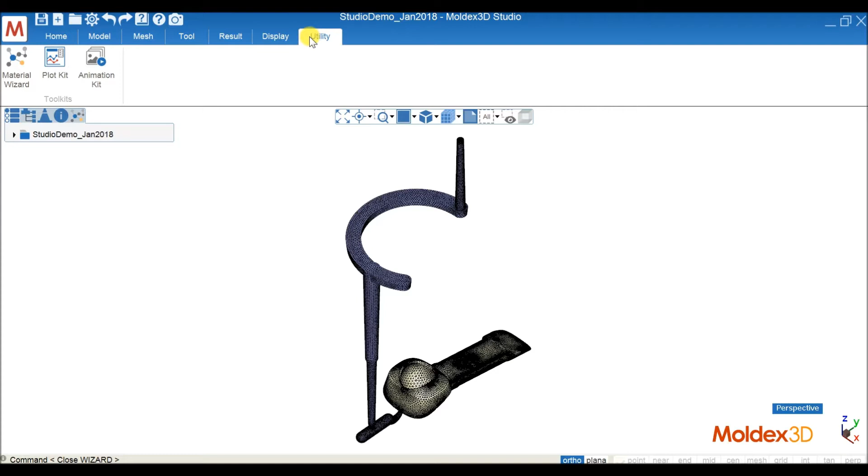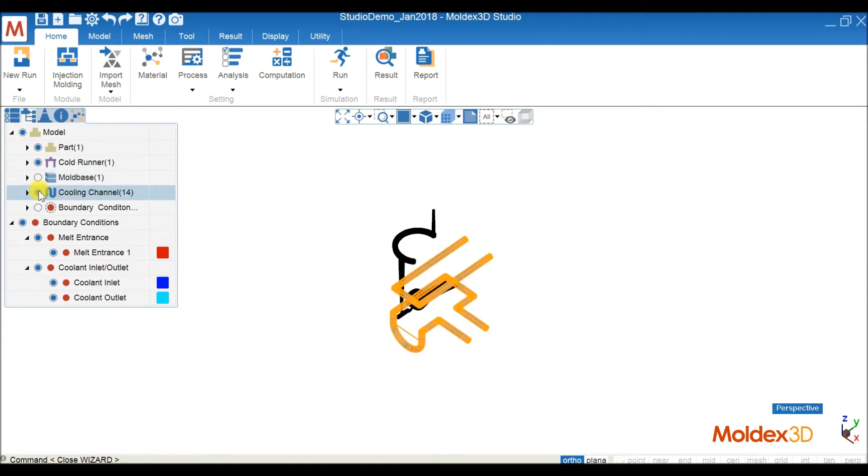So on the top that's the ribbon menu, and on this side we have a tree-style structure - this is the project tree, and here we have a model tree. This is very convenient for users to show or hide certain objects. For example, if I want to show the mold base, the cooling channel, or hide it, it's very easy to control in this model tree.

We also have the defect tree, so we can see the surface mesh defects or solid mesh defects that remain for the mesh. Besides the defect tree, we also have a run information list - this is new in Studio. Users can check again the model details, the material, or the process condition.

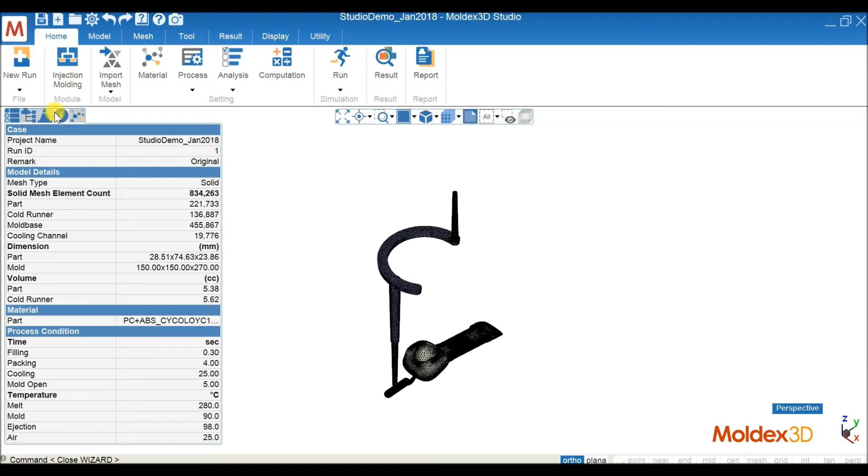And the last in the model tree, we have the geometry and also the material which belongs to it. So this is the interface for this R16 Studio, and for the operation we also have new tools here.

As you can see, we have tools like edit remarks, in case you want to give a certain name for a certain run - for example, here we have original, revision 1, and revision 2, something like that. That belongs to edit remark.

We also have export runs - for example, if you want to export run 1 to a new project, you can freely do that, and you can give a specific name for that one too. So edit remark and export are very convenient.

Inside we also have copy run, clear results, or delete runs. For copy run, for example, we can copy input data only, or full run data in case you already have results, and you can also customize which results you want to copy. This gives benefits to users who want to copy several runs but only change certain inputs, keeping the rest the same.

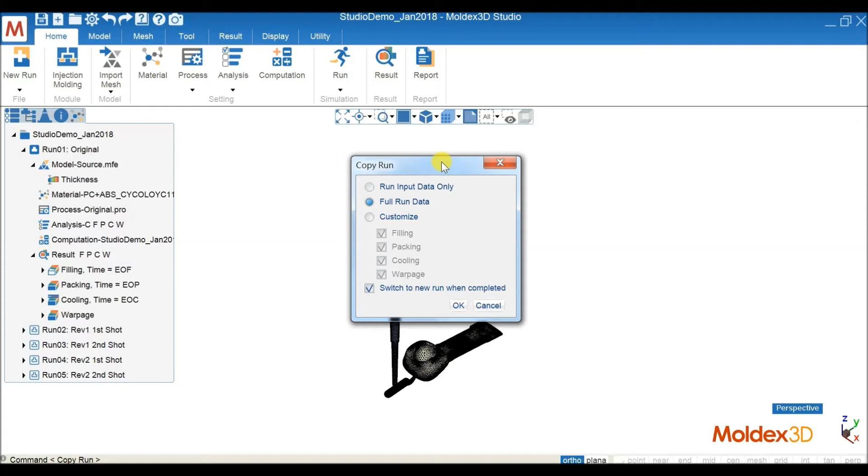So it will be convenient for users to do the operation - run input data, full run data, customize. Users can pick anything they want.

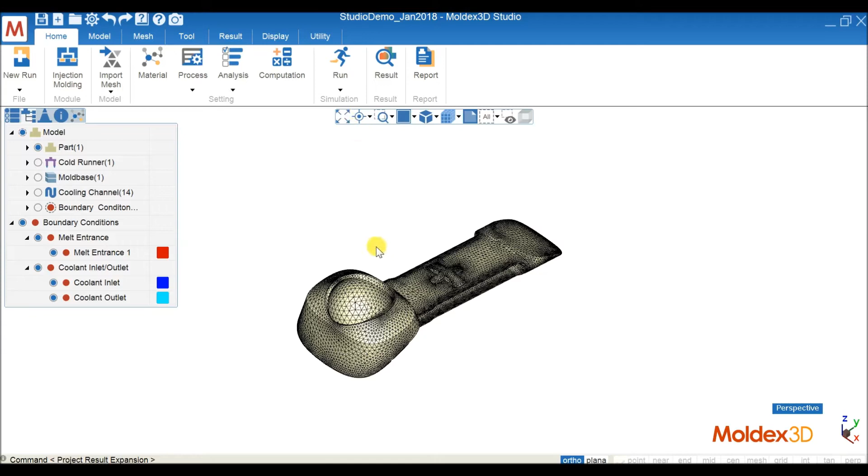The next section is about MCM analysis. We know that in regular injection molding, one common case is MCM, multi-component molding, where we have a part or part insert, something like that. Basically in this case, like I introduced before, we have the problem about the ball socket with a sink mark because of its thickness.

In the studio, we can also display the thickness distribution like this. As you can see, the thickest region will be on the ball socket, which induces the sink mark problem.

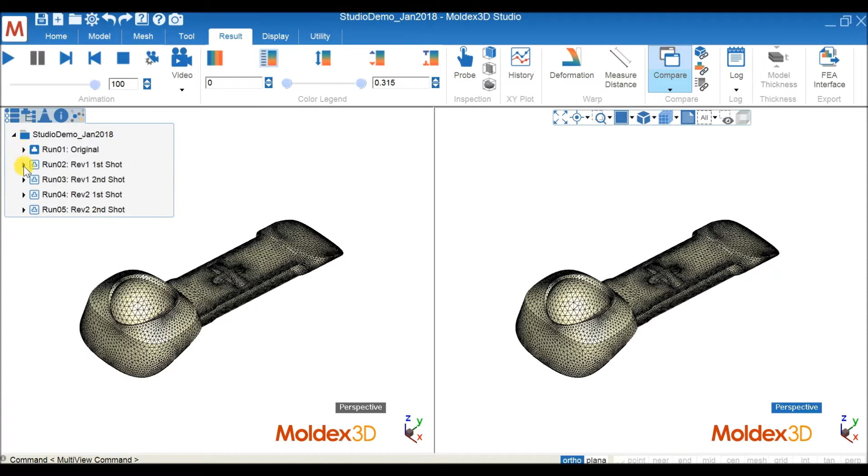So that's why we will try to do a 2K injection molding for this case. And I would like to compare using our studio interface, side by side on the left and right. This is a special feature in the studio that you can compare two different runs side by side, left and right, in one platform, so users can conveniently control and show everything in one place.

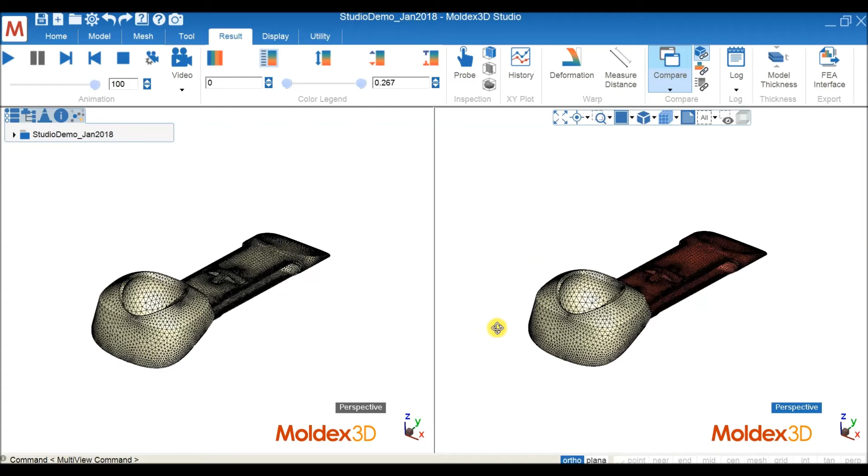So on the left side you can see that's a 2K injection molding. The first shot is on the beam, and the second shot is on the ball socket. So our studio can now also support this 2K injection molding, or MCM technology.

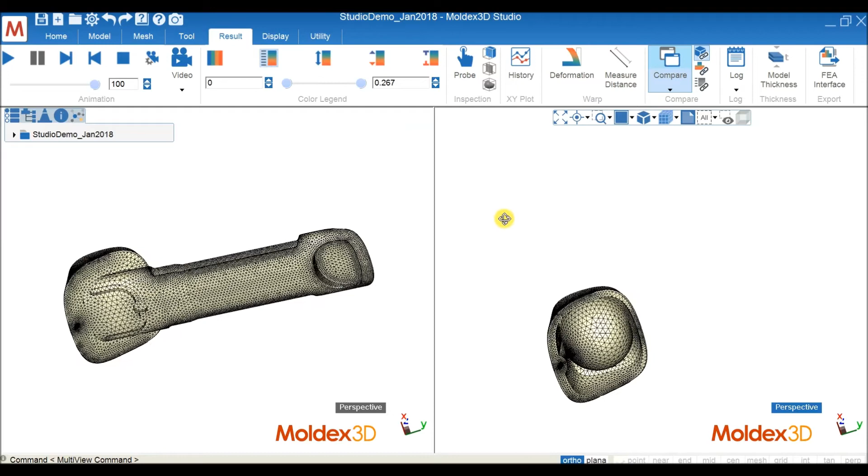Here we can also see why we need to change to 2K injection molding, because the thickness for the ball socket will be reduced by using this technology. So this will help the designer solve their sink mark problem.

We can hide and show the part insert in the model tree, and also check the material. Users can easily set the material for the part and for the part insert very conveniently from our UI.

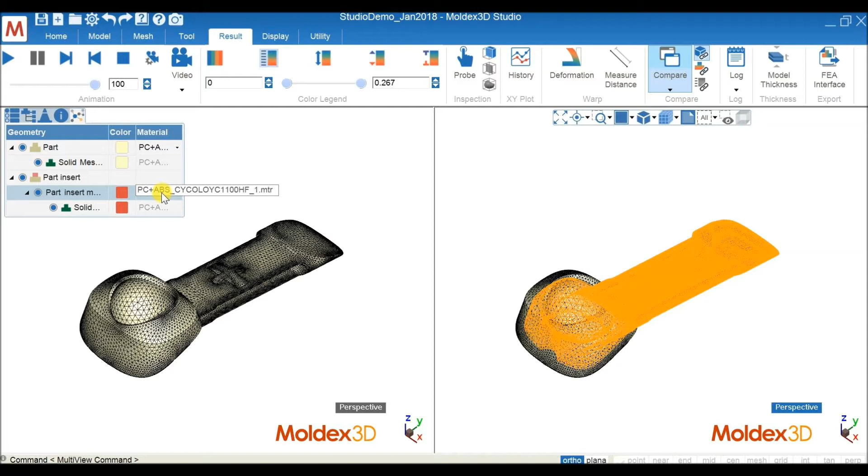On the left side, I want to open Run 2, which is the first shot for revision 1, so you can get a feel for this 2K injection molding. On the left side you can see the first shot, the beam, and on the right side the second shot, the ball socket.

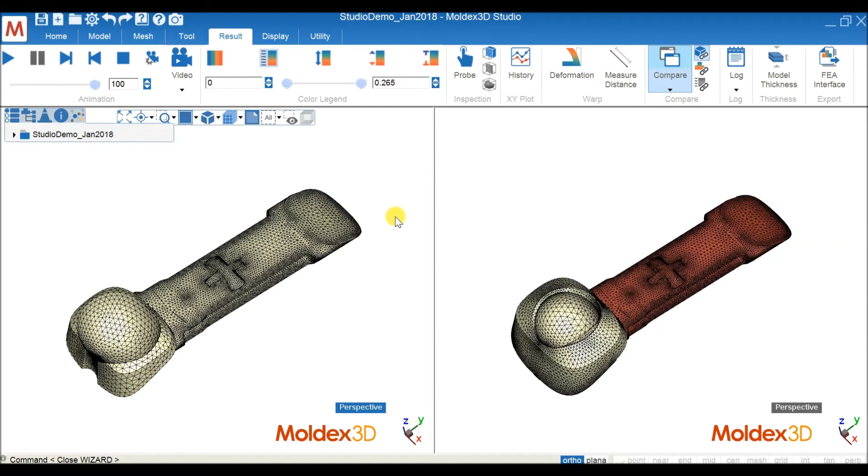So this is our MCM analysis for the studio. The special setting we usually have in MCM analysis is in the computation parameters, where we have an MCM tab, and here we have what we call a link with the previous shot.

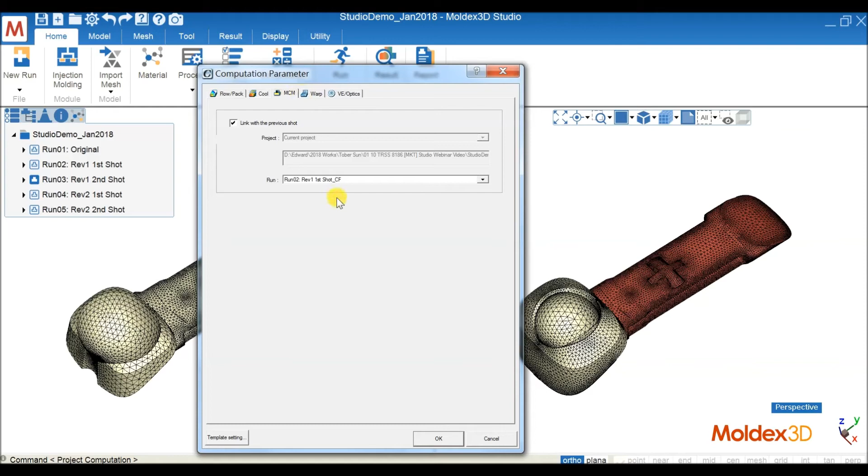This means your second shot will have a link with the first shot, so it carries the temperature result from the first shot. This will influence the result for our second shot, which is the case for example in overmolding.

The last section of the demonstration video is about result inspection. We'll see several new features in R16 Studio. For example, the first one is display maximum and minimum.

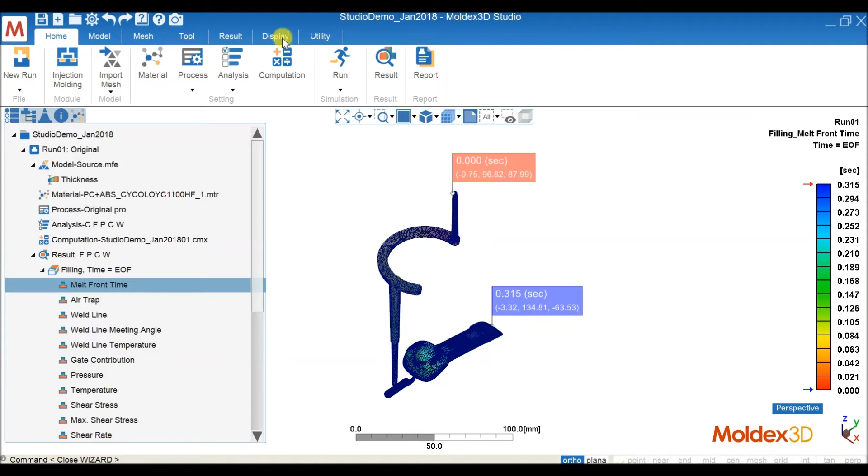When you select a particular result, like melt front time in this UI, you can check the maximum and minimum values shown. If you turn off something like the runner, these maximum and minimum values will automatically update themselves, which is very convenient for users. If users want to hide it, they can also do so in the display setting. That's our new feature, display maximum and minimum.

The next thing is, for example with temperature, if we want to check the maximum, the red color, the highest temperature, we can use the clip and also see the distribution—what is the temperature distribution for this case.

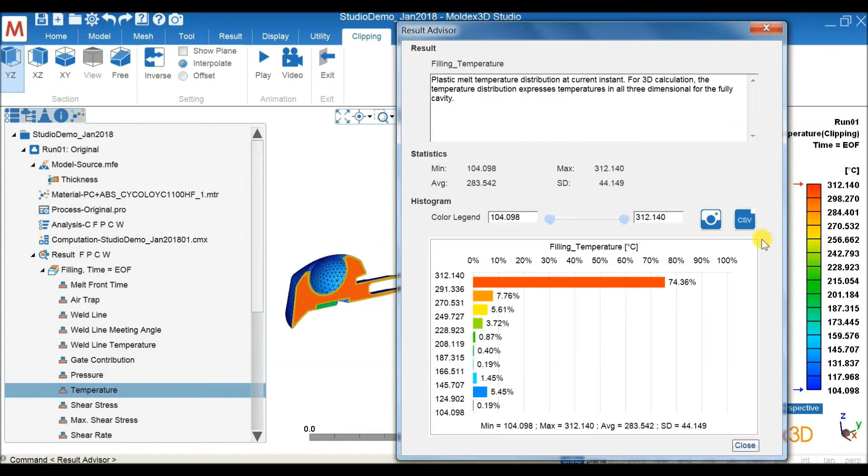We have a new feature now in R16, we call it Result Advisor. Users can double click on the result, and it will show the statistics or distribution of the temperature. It's very convenient to use the studio to check or investigate the result.

The third new thing in result inspection is a tool we call probe. If you notice, in the project we have what we call the measure node, but in R16 Studio we have probe.

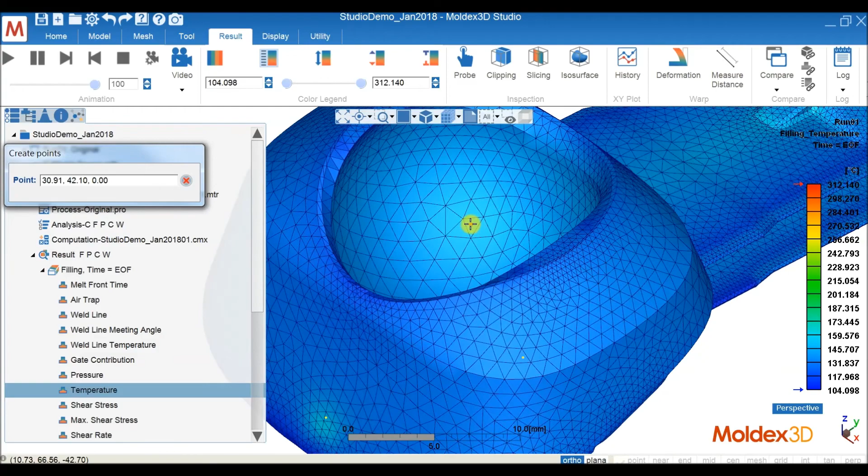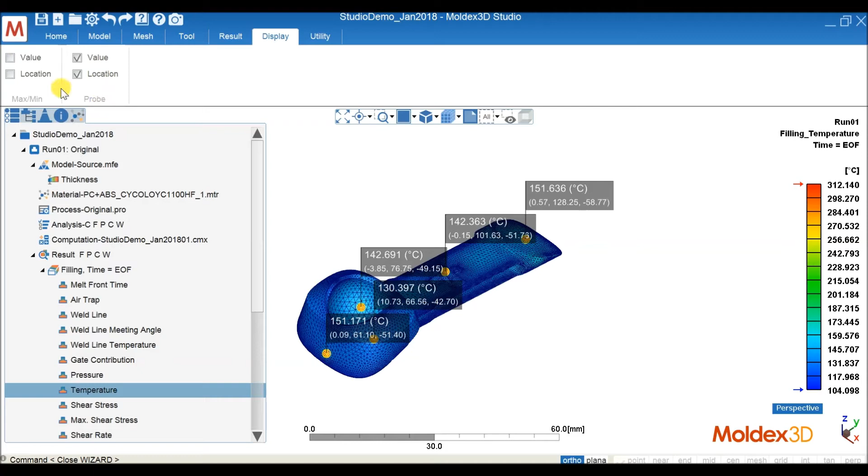As you can see, we can place the probe anywhere—it doesn't necessarily have to be at a mesh point or mesh node, it can be outside of it, as shown when I pick it outside the mesh node. But even picking it outside there, we can still check the result. Our probe can do intermediate value calculation, performing the calculation at intermediate mesh nodes. So we can double check that the probe is not on the mesh node, but it can still show the result.

In case users want to hide it, they can set that in the display setting. That's the probe, and we can also check it in the model tree in case the user wants to hide the probe or show it.

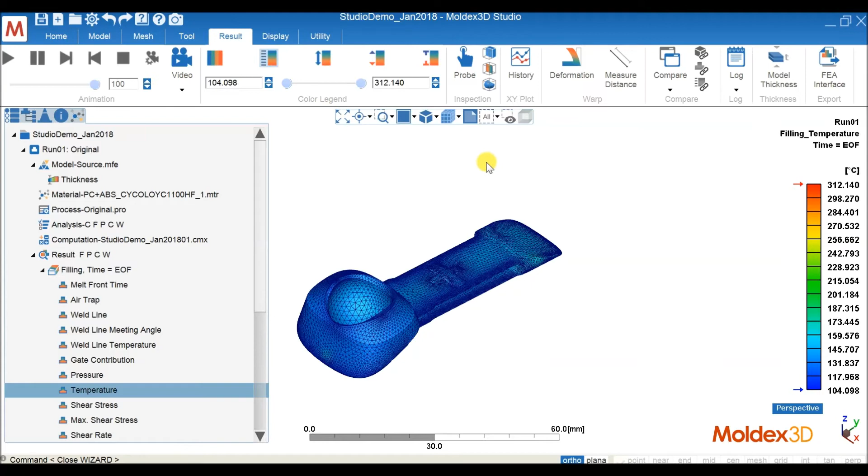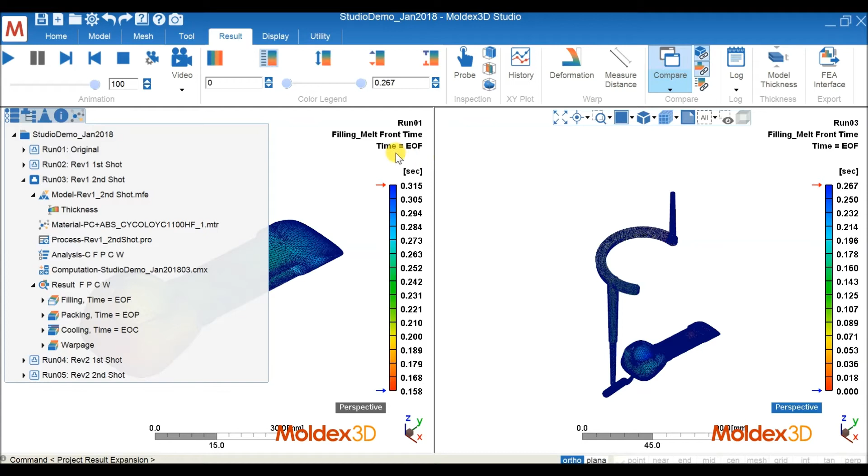Now I want to compare again the original design, run 1, with the revised design, run 3, the second shot with 2K injection molding. We can use the compare tool on the top side. On the left is run 1, and on the right is run 3. We can sync the angle and sync the result, so now it shows the same result, melt front time, for both left and right side. As you can see, the original design and the second design have different melt front behavior because they have different objects or parts.

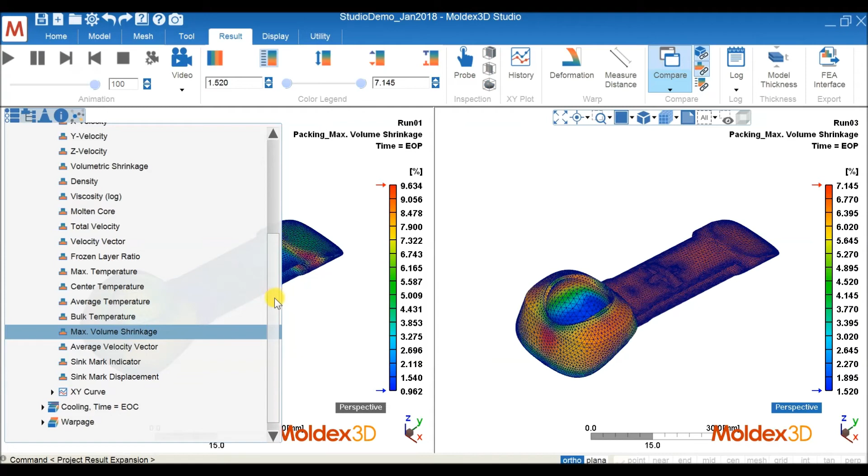Next, I want to investigate the volumetric shrinkage. We just need to select the volumetric shrinkage for one run, and it will automatically change the other run to show the volumetric shrinkage too, using the sync result tool. Then I click sync range, which means the range on the left side will be the same as the range on the right side, helping users judge which design has the higher shrinkage.

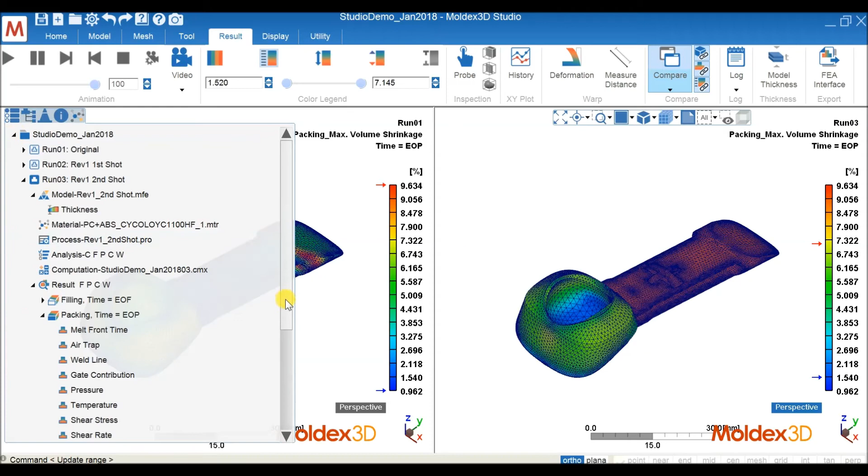For example, on this side we can see that run 1, the original design without 2K injection molding, has the higher shrinkage. So the revised design 1 really can solve or improve the problem for the sink mark seen in the original design. Now I try to open the sink mark displacement. As you can see, the sink mark on run 1 is higher, based on the color distribution and also the value.

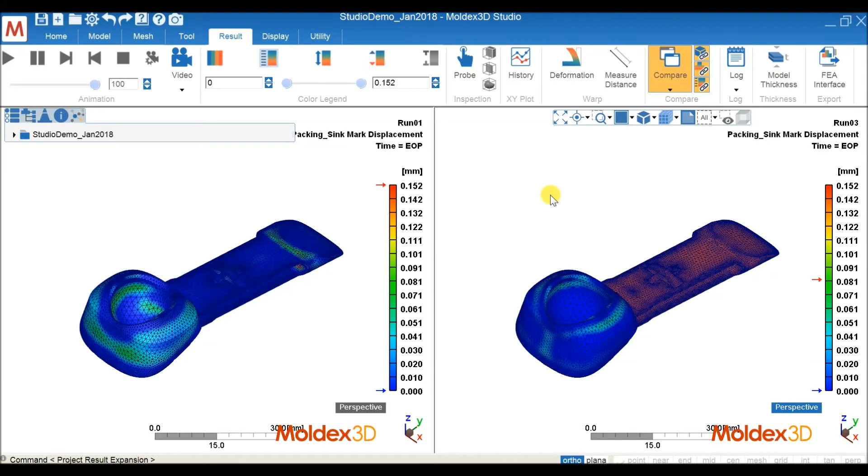So that's how we can use the Moldex3D Studio to do the comparison using sync angle, sync result, and sync range. This is the fourth new function in Studio.

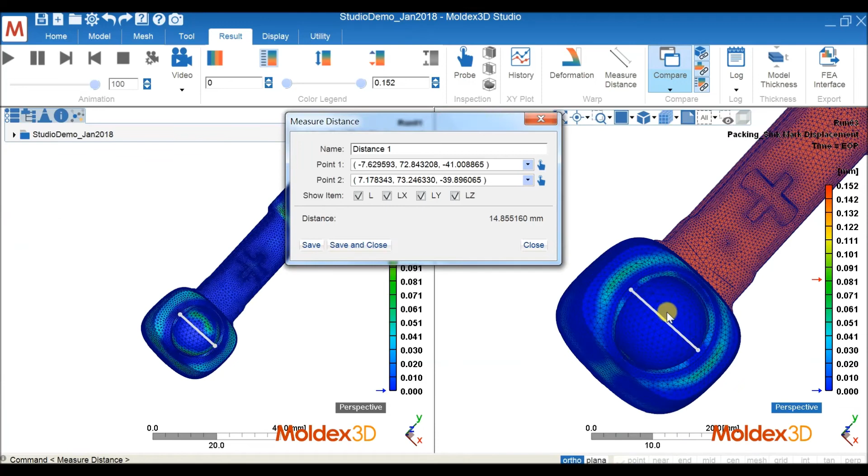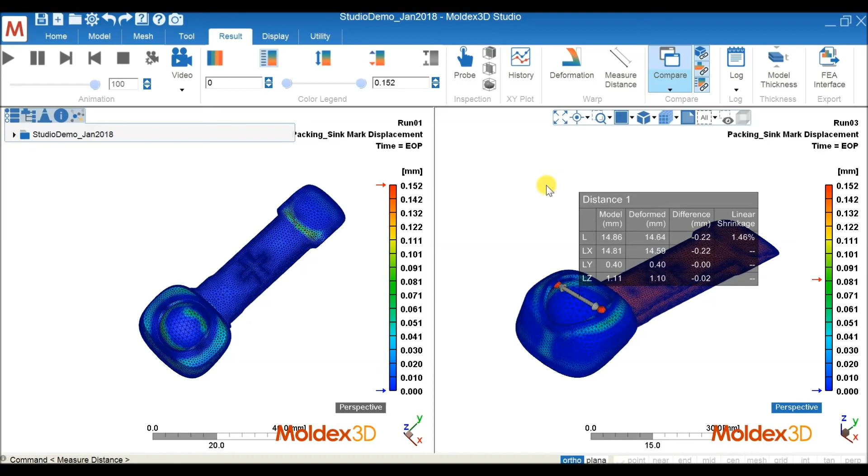We call it measure distance. Basically, users just need to point to 2 points anywhere they want to select, and it will help the users do the measurement, for these 4 things: model size, the size after deformation, the difference, and the linear shrinkage between those 2 points. The Studio will help plot this table, showing the linear shrinkage on those 2 points.

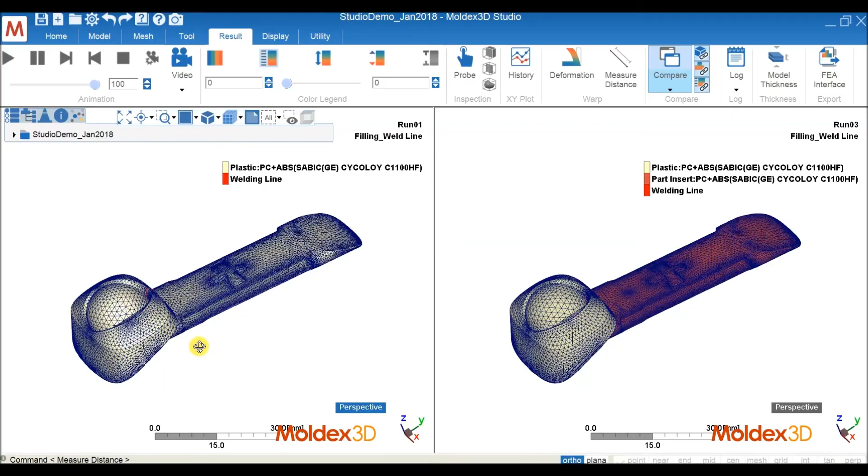Next, because we already know that the revised design improved the sink mark, now we have another concern: the weld line, the cosmetic surface. From here we can see that our revised design still has the problem with the weld line on the socket ball. That's why we need to do a revised design too, to also improve or eliminate this weld line.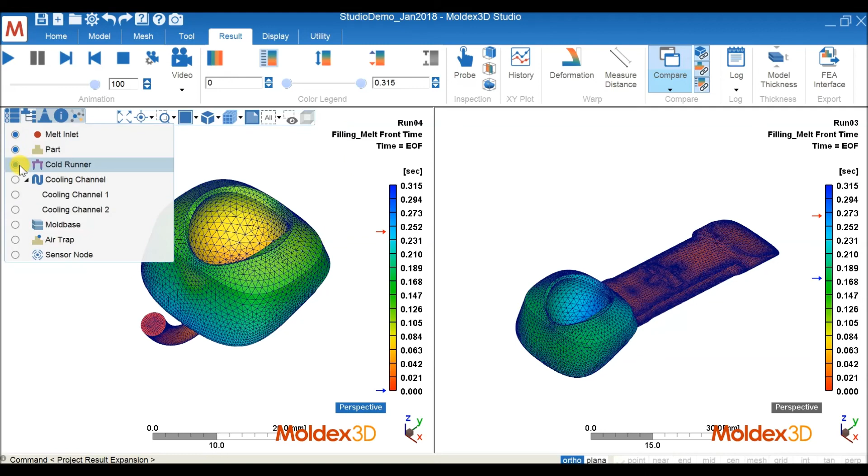In this display, I show revision design 2 on the left side. Basically, we changed the gate, which also changed the melt front behavior. On the left side, you can see the melt front behavior going from the bottom to the upper side of the socket uniformly, which will eliminate the weld line.

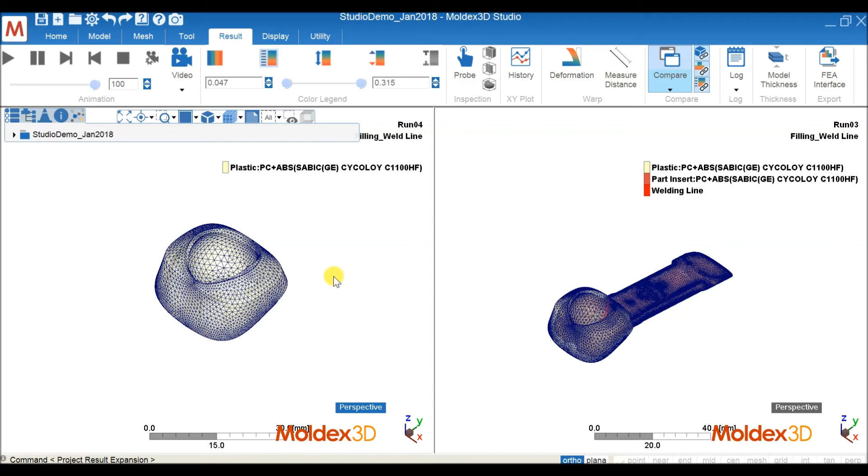We can double check and confirm it with our weld line result. As you can see, on the left side we don't have any weld line on the socket ball, but on the right side, the revised design 1, we still have that problem. So it's very easy for users to compare and see the improvement from different revision designs.

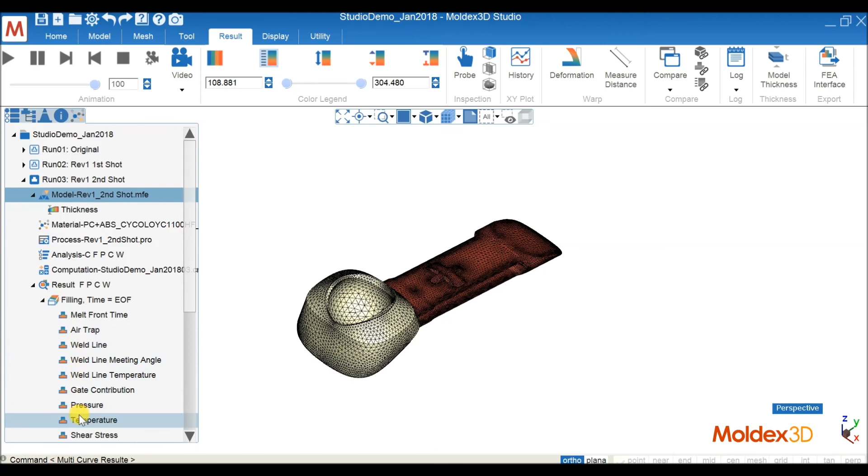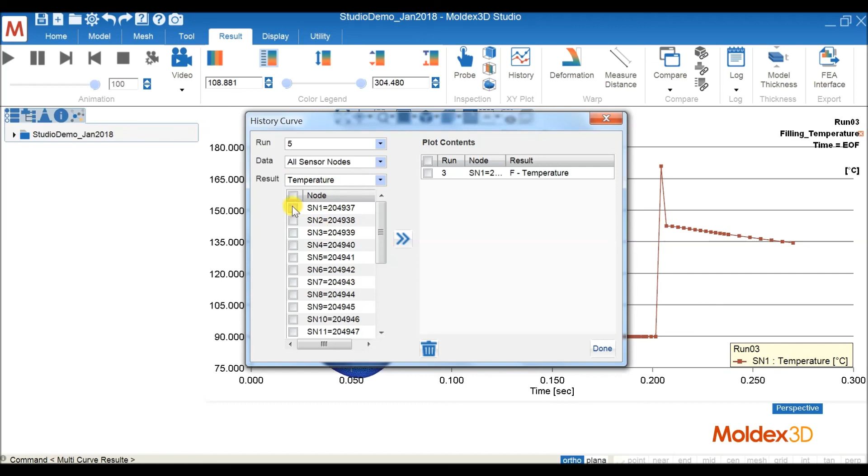This is the last new feature I will demonstrate in the video. We call it the history curve result. Here I compare run 3, the second shot of revised design 1, with run 5, revised design 2. I plot the sensor node result, the temperature result for the sensor node.

This is a new feature in the Studio. In the project before, we didn't have the ability to compare sensor node results from 2 different runs, but in the Studio we can do that. This is a special feature only in the Studio, very convenient for users to understand the sensor node result, for example, how the temperature changes using revised design 1 and revised design 2 at a certain sensor node location.

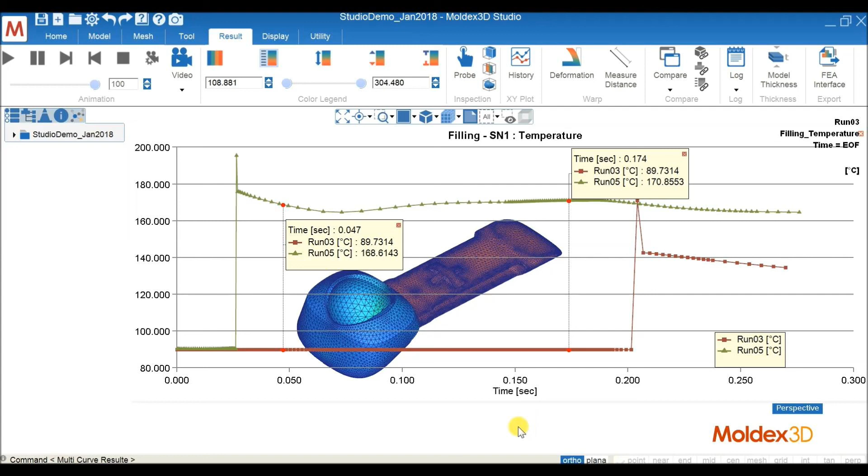So yeah, that's all for the demonstration.